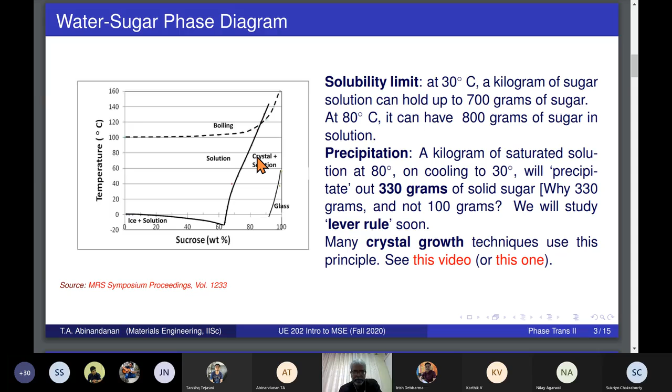But once some crystal is formed, it will start sinking to the bottom because of the density differences. Liquid allows that, whereas in the solid state, such a thing does not happen. So wherever precipitates are nucleated, they just stay put, and you can see them in the microstructure. I have another presentation where I want to show you the diversity of microstructures that are possible here, and anyway, we'll move on.

The nickel-rich end of the phase diagram is relevant for the nickel-based superalloys. This is the prototype binary alloy for the nickel-based superalloys. There are corresponding superalloys available based on iron and cobalt as well. And in cobalt, it's a really new, very young field, and we have a couple of groups that are leading groups in their work on cobalt-based superalloys.

Professor Kamanio Chattopadhyay and Professor Surendra Makineni, who joined us about a year ago, January 1st of this year. They have done some really fabulous work, and they continue to, because these are things that are still under development. Anyway, they all share similar microstructural features, which unfortunately I will have to defer to the other presentation, which I'll post as additional course material.

Anyway, if you take an alloy with about 80% nickel, this is atomic percent, by the way, there is weight percent which is up here. And you can see that this scale is obviously different from the scale here because of the difference in atomic weight.

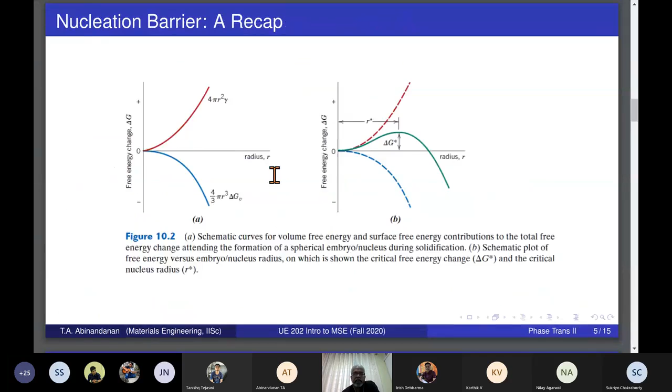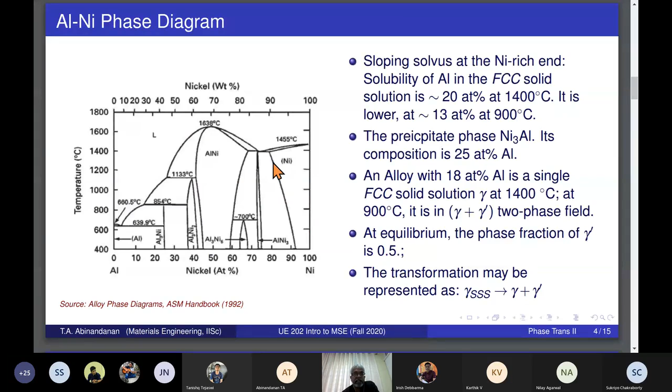So just like delta G_V is 0 there at the melting temperature, here it is 0 for an alloy at the solvus temperature. That is, in the case of 80% alloy at this temperature, delta G_V, the volume free energy change associated with precipitation, is 0 at the solvus temperature itself. And of course, it is negative for any finite undercooling.

Undercooling itself can be described in this fashion, T sub S minus T, where T is the relevant temperature to which it has been quenched. Analogously, we can also use supersaturation as an indicator for the tendency to precipitate. And that would be defined in this fashion. This is the alloy composition. This is the C gamma. Again, at the lower temperature, the composition of gamma given by the solvus is this C gamma.

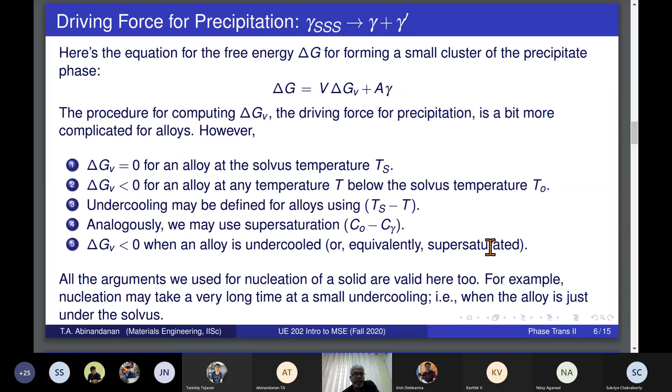And of course, delta GV is negative when the alloy is undercooled or supersaturated; the larger the undercooling, the larger is the magnitude of delta GV. All those things carry over quite nicely from our discussion of solidification. All right, so we have already talked about density differences causing certain interesting possibilities. In the solid, of course, the precipitate just stays put. Wherever it is nucleated, it just stays there. It only grows bigger or smaller depending on the conditions, but it just stays there.

And the other main thing is this: diffusion in the solid state is 4 orders of magnitude slower than in liquid. Well, this 4 orders of magnitude is valid near the melting temperature, and it becomes even slower, by many more orders of magnitude, as the temperature drops. For example, diffusion in nickel alloys is practically zero at temperatures below 50% of the melting temperature. That has something to do with diffusion, which we haven't discussed in detail. We'll spend some time on that topic a little later. Maybe I'll put together a half-an-hour lecture.

But right now, this is generally true for all these substitutional alloys, where the two elements substitute for each other in the lattice. For interstitial alloys, such as carbon and iron, this limiting temperature goes down maybe to about 20–25% of the melting temperature. All these are guidelines, and there is a very strong reason to believe these guidelines, and a strong scientific basis as well. Different materials will give you a different prefactor here, but by and large, as you come down to lower and lower temperatures, diffusion is practically zero.

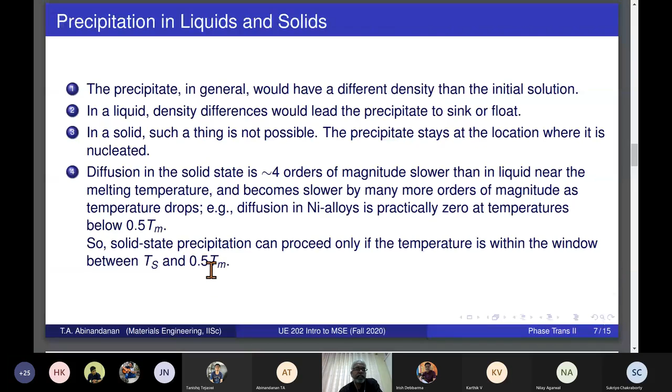All right, the next topic is eutectoid transformation. This is the iron-carbon phase diagram. Carbon, as I just now said, is an interstitial solid solution. This is pure iron. The entire phase diagram is only restricted to this 6.7, which stands for Fe3C. This is weight percent. So if you do the calculation for the amount of carbon in terms of weight percent in Fe3C, it would be that. So beyond that, one typically does not go. It's mostly carbon and iron. I don't think there is anything interesting there in terms of the phase diagram or its uses.

Even within this small region, there are interesting things. Pure iron goes from BCC form to FCC form at high temperatures. And of course, it goes back to BCC form before it melts. In the FCC form, it has a lot more solubility for carbon. You can go up to 2.14% carbon here. Whereas in the BCC form, it has extremely limited solubility for carbon. As you can see here, it is 0.02 weight percent. This is percent, not fraction. So extremely tiny amounts of carbon can only be dissolved in the BCC form.

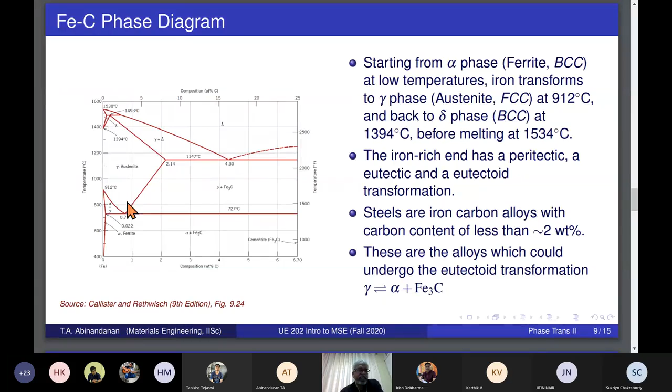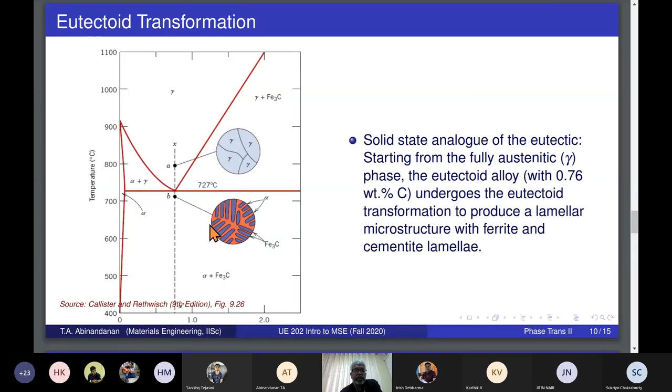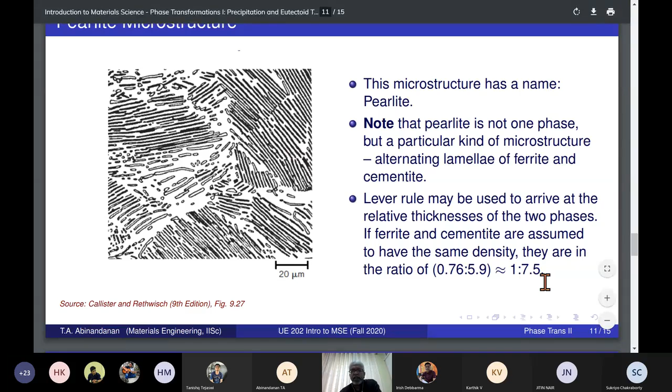But treat this as some sort of a prototype. You take this alloy into the single gamma phase, bring it down to some low temperature and hold it. It forms alpha ferrite and cementite. And just like eutectic solidification produces lamellar microstructure, this also produces lamellar microstructure. Here is the microstructure, and you can use the lever rule to find out the relative thicknesses. Near equilibrium conditions, it should be 1 to 7.5 or so.

And just like in the case of eutectics, this lamellar microstructure provides an efficient way to make this transformation proceed. So alpha is this ferrite, which is the larger volume fraction phase. That 7.5 to 1 is what I mentioned. So if the cementite thickness is 1, this is about 7.5 or so. So this has very little carbon, but Fe3C requires a lot of carbon.

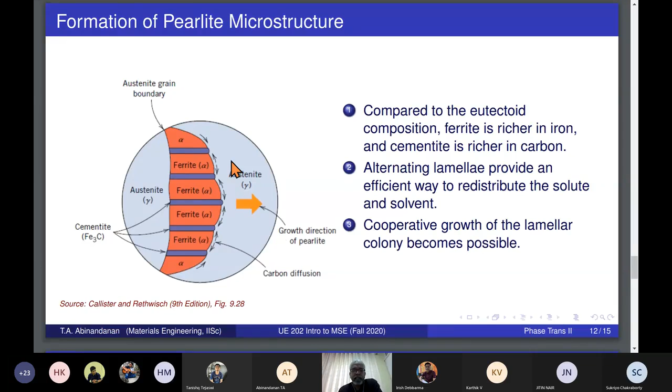So this provides a very nice way in which carbon with its intermediate composition in austenite can be redistributed. Carbon can go straight along the interface to Fe3C, allowing it to migrate forward. And as this region becomes lean in carbon or richer in iron, alpha can also move forward. So it provides a very nice way of redistributing the solvent and solute atoms, and it also allows for the cooperative growth of these things.

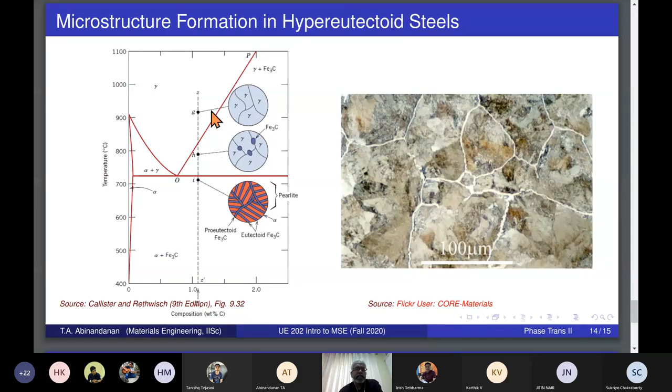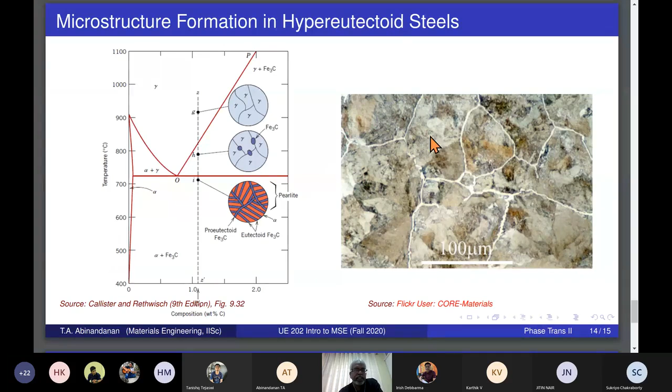All right, you can do the same thing by going to the other side as well. In this case, the cementite has to come out, and it again comes out at the grain boundaries due primarily to crystallographic reasons. So you end up decorating the prior austenite grain boundaries with cementite, and the interior again undergoes this eutectoid transformation, producing alternating lamellae. That microstructure is called pearlite.

Anyway, so this is where we stop with this lecture. But in the next lecture, which is probably going to happen this Thursday after the tests are done, I'll show you the variety of interesting microstructures that are possible in the solid state. And that is what makes material systems really interesting.